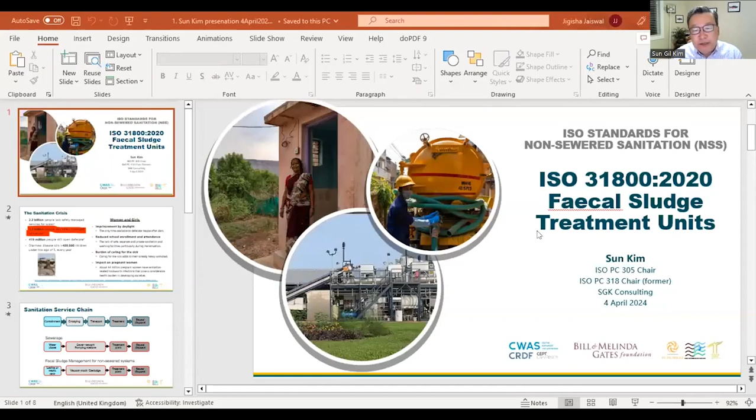As we discussed in the introduction, there is a tremendously bad sanitation crisis in the world, and it affects every country in the world, particularly developing countries. But even in the US, the country I live in, there are many areas where sanitation is problematic.

Per the joint monitoring program by the World Health Organization and UNICEF, currently 3.5 billion people lack access to safely managed sanitation. The tremendous toll it has on all humans, and particularly on young children, with preventable diarrheal diseases from fecal to oral contamination, is heartbreaking, and really it is a human rights issue.

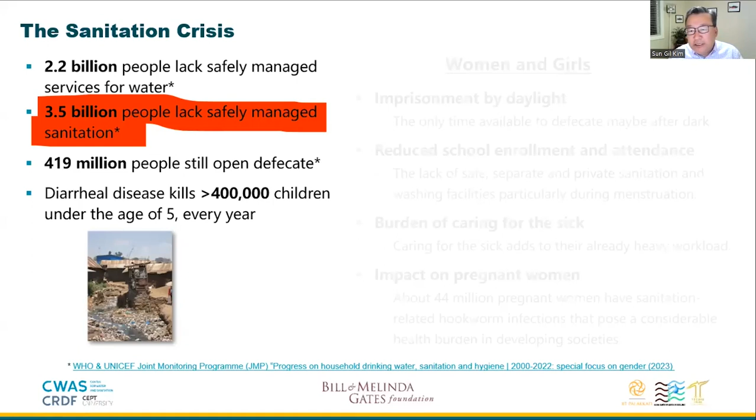The impact to women and girls particularly is extremely negative, especially considering that the impact of caring for the sick and also poverty typically has a much more negative impact on women and girls.

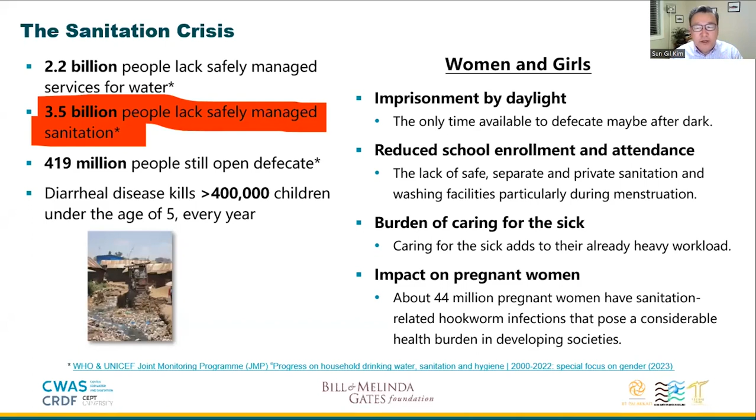The sanitation service chain, whether sewered or non-sewered, always includes capture, then conveyance through sewer pipes or trucks, and ultimately treatment and reuse or disposal. But oftentimes this does not work in non-sewer sanitation, where contaminated fecal material with all its pathogens just remains in the community.

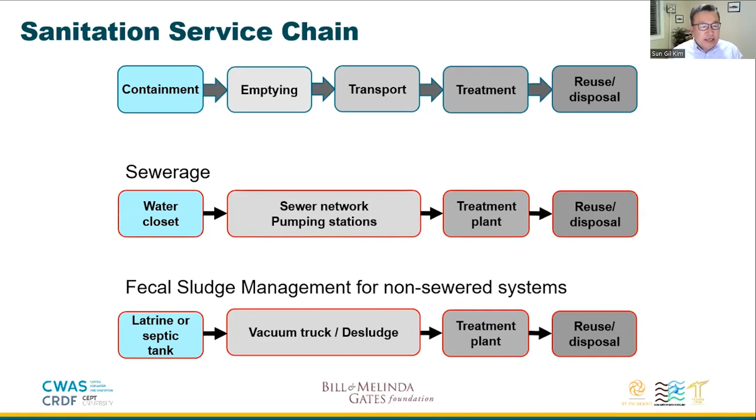This references the topic of our non-sewer sanitation webinar number 2, where we talked about ISO 30500, the reinvented toilet, killing pathogens, and containment and treatment all at the household or community scale, on site. That was on webinar number 2, available via recording.

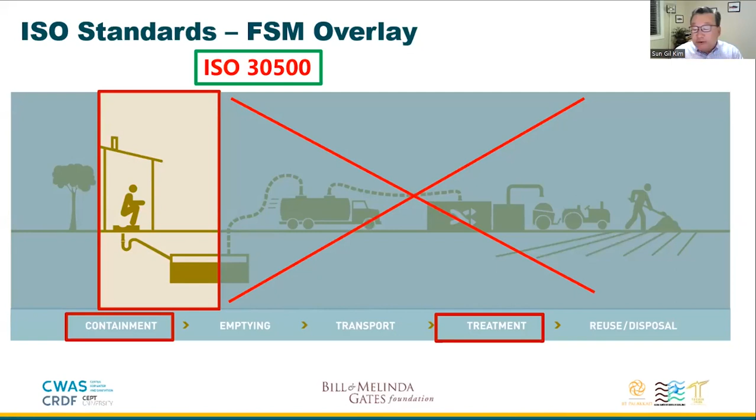The next slide references webinar number 3, ISO 24521, a management guideline that discussed the whole service chain. The topic of today's webinar, ISO 31800, is that treatment system - once the fecal material is collected and transported in mass, then what do you do with it? ISO 31800 defines the technical requirements.

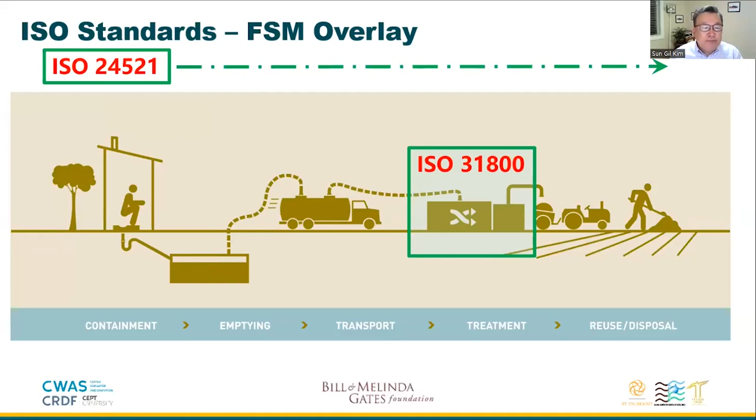I'll spend a little more time on this particular slide. These are the key aspects of ISO 31800: it's about a fecal sludge treatment unit, which is a component or part of the larger fecal sludge treatment plant. It defines the design, performance, and test requirements of such devices that would be manufactured and then assembled on site at a fecal sludge treatment plant.

Just like ISO 30500, which is for the household scale toilet and treatment system, this plant system is intended to be technology neutral. We have the privilege of having engineer Mansour Fall, who will describe in more detail two such systems - dry combustion and pyrolysis systems - as well as Professor Marc Deshusses, who will talk about a supercritical water oxidation system. These are really exciting.

While this will not be presented, there is also another type, a mechanical vapor recompression system, and you can read more about it at sedron.com/varcor. I'm really excited to discuss these technologies, to hear more about these technologies that are intended to be compliant with most, if not all, the requirements of ISO 31800.

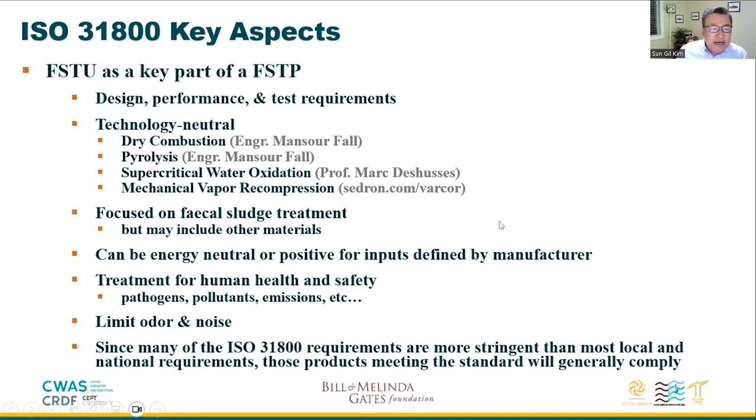So the final slide. Key aspects again: implementation of these quality standards will support market readiness, which is to support the regulatory environment. It's very important that you meet local and national regulations, and also to have readily available competitive products so that the sanitation crisis can be resolved in a manner helpful to the largest population possible.

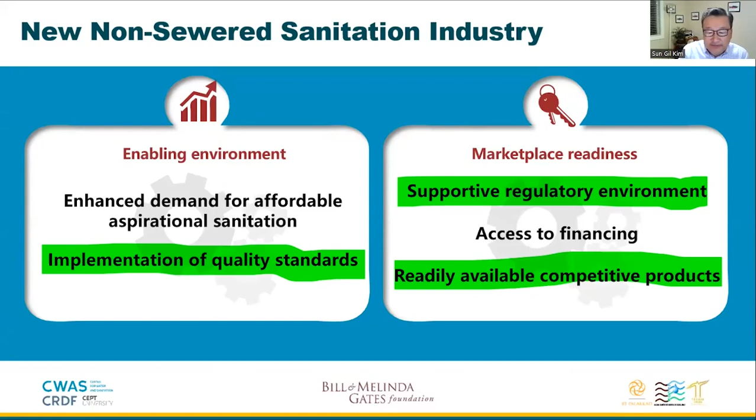So with that, I'll revert back to Dr. Devasena. Thank you very much. Yeah, thank you, Kim, for emphasizing the significance of implementing quality standards, as well as underscoring the necessity for this kind of regulatory environment and highlighting the key aspects of ISO 31800. Thank you very much. If there are any questions, we will take them at the end of the session.

Now let us move on to the next speaker. We have Chris Chan, Project Manager, Corporate Sustainability Office, TUV-SUD. He will be presenting on the scope and technical requirements of ISO 31800, and also the ISO 31800 certification process.

Before allowing the speaker to give his presentation, I would like to introduce him. Chris Chan joined TUV-SUD as a project manager with 5 years of experience with ISO 30500, and also served as technical lead in the development of ISO 31800. During his tenure at TUV-SUD, Chris has validated these standards, tested with manufacturers, and worked with laboratories to build up their capabilities in different countries including China, India, South Africa, and Senegal. Currently, Chris is working on certification of the first ISO 30500 product in the world, and also leads the 5-year systematic review process for ISO 30500 as project lead.

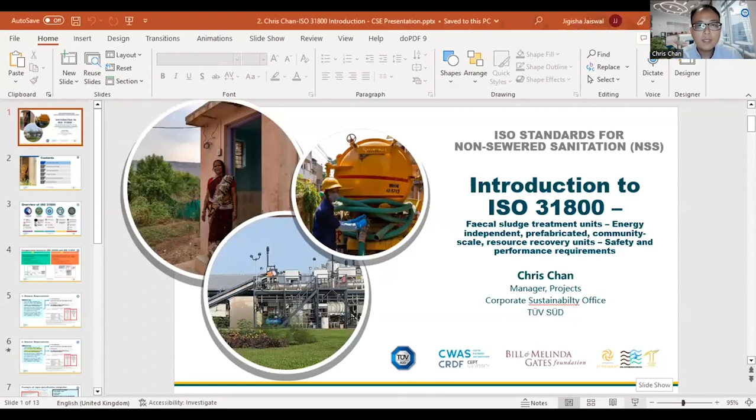Good morning, afternoon, and evening to some. So I'll be presenting the introduction to 31800. I hope most of you know something about it. If you don't, I'll go through what it's about, basically. Next slide, please.

So I'll go through a high-level overview of the entire standard. I'll only be picking out the major specifications for the standard, and then what makes it different, probably from other standards around, even for sanitation or non-sanitation products or plants. Next slide, please.

So for ISO 31800, similarly to 30500, the target audience are usually manufacturers. They need to know how to design their system according to certain standards or requirements that the market or general industry is looking for. Then you have government, regulators, and buyers who want to buy or invest in such equipment, so they might look into the standard to see if plants or FSTUs are compliant, or even partially compliant, to 31800.

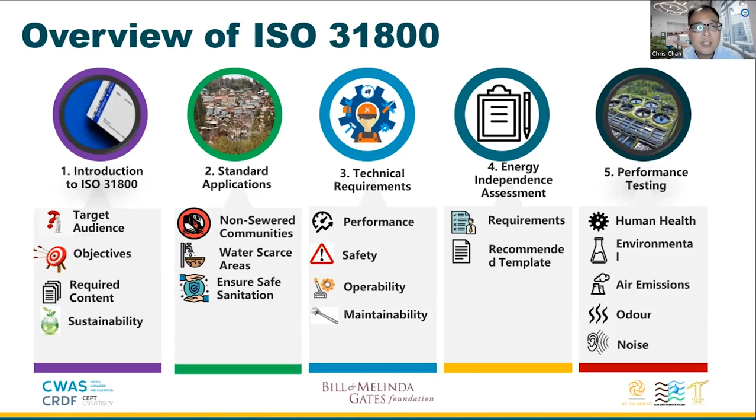It's something that is quite different from any other standards around. And then last but not least, performance testing, where what's coming out of the system, what are they being tested for?

Comparison between 30500 and 31800. Just wanted to see a show of hands. If everyone could use the chat to let us know: 1 if you are familiar with 30500, 2 if you are familiar with 31800, 1 and 2 if you are familiar with both, or 0 if you are not familiar with any of them. Could I get the participants to try to participate?

Cool, I see quite a lot of 1 and 2, and of course 0 as well. That's why you guys are here. A lot of 1 and 2s, not what I expected, because I thought you guys were here to understand a bit more about 31800. But of course, after the presentation, if there's more questions, in-depth or detailed questions that I'm not covering, feel free to reach out to us as well.

Okay, so with regards to the slide, what's the difference between the two standards? Since most of you know the standards, the major differences are the 5 points in the boxes, the green and the orange. 30500 has a user interface and a treatment unit, but 31800 is only for the treatment unit. The next major difference is 30500 is a household scale, small scale, while 31800 is a community large scale system.

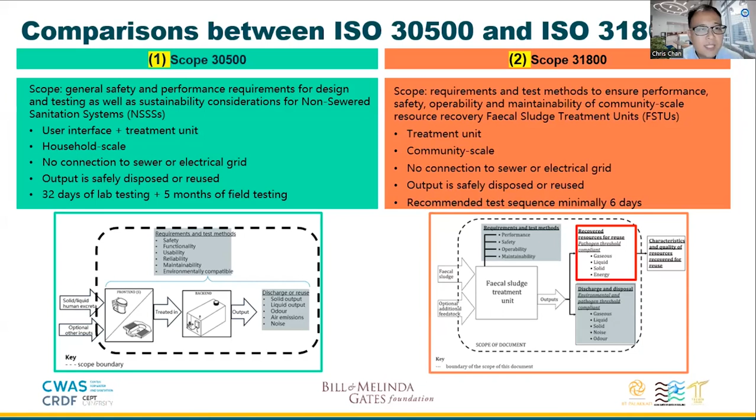Okay, just general requirements. Whenever we start testing, or the manufacturer comes to look at the standard, one of the most important parts is the FSTU needs to have an input range of input criteria, input parameters. The reason why is because we understand that anything can come into the fecal sludge treatment unit.

The vacuum trucks are collecting fecal sludge from households to maybe some pits or anywhere else, so they are not sure what is being dumped into these pits. That's why there is usually a range of what is coming into the FSTU. Before any testing is done, the manufacturer or operators have to tell us the range of parameters so that we can take into consideration if any of the days go out of range, we can disregard the test because it would be unfair to the operators or manufacturers.

So I highlighted this: primarily treated fecal sludge will be with the need for energy independence, but also secondary inputs. If you need biomass or wood chips or municipal waste to start the system, it can be put into the system as well without the need for energy independence. So energy independence is only for primarily treated fecal sludge when it's at steady state. I just wanted to highlight this.

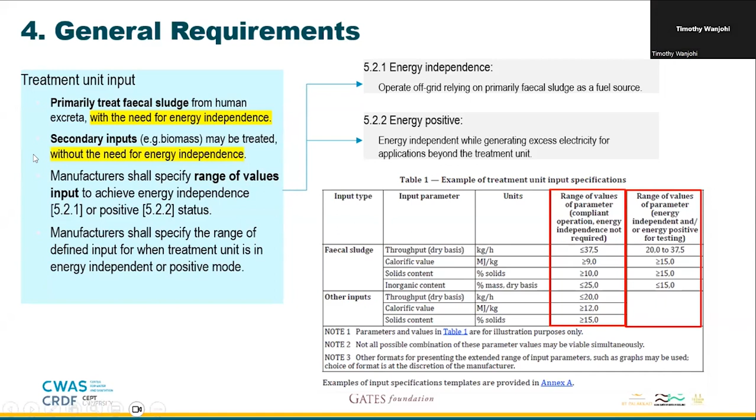So this is an example of what the manufacturers will provide to certification bodies like us: how much is the throughput, the moisture content, the ash content, calorific value, even if you have heavy metals in the fecal sludge - what are they? Because it will affect what is coming out of the system.

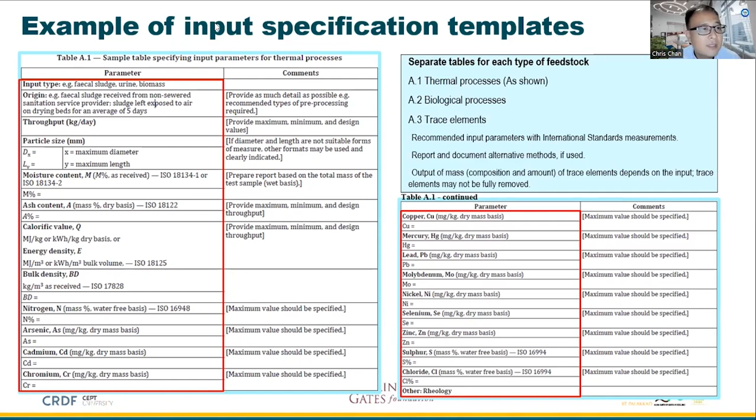So just a high-level overview of technical requirements. The standard requires manufacturers to declare the downtime, maximum technical availability, and there's documentation involved with HAZOP, mechanical and electrical requirements in the standard, as well as anthropometric and ergonomic design requirements. For example, maintenance should be easily accessible. Last but not least, maintenance adjustment requirements cover whether points are accessible, whether maintenance parts are provided, and whether this is in the manual. These are the very basic requirements for any plant, be it fecal sludge treatment units, boilers, etc. All standard in the industry.

Okay, next slide please.

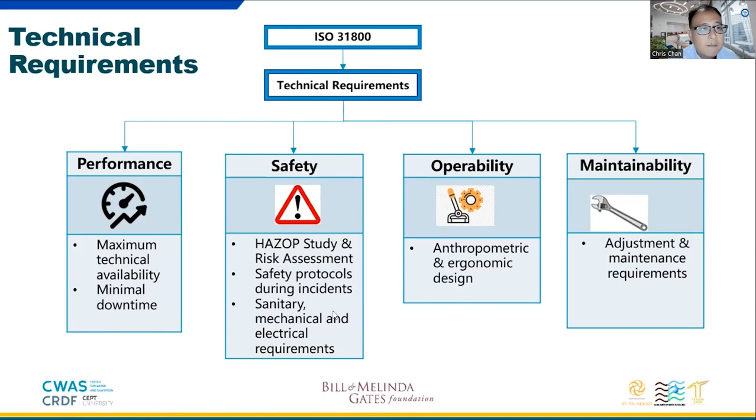Product literature documents also need to be submitted to the certification body, or are at least requirements in the standard. This includes basic system information, safety and maintenance, and complexity of the task - do you need a highly qualified person, or can lesser qualified people do certain stuff. Then there's the sustainability part, which covers consumables, the quantity required for operation, and minimal GHG emissions declaration. And of course, resource recovered products - what type of resources, or potential resources, can be recovered from the system. These are important information even for investors or buyers.

Okay, next slide please.

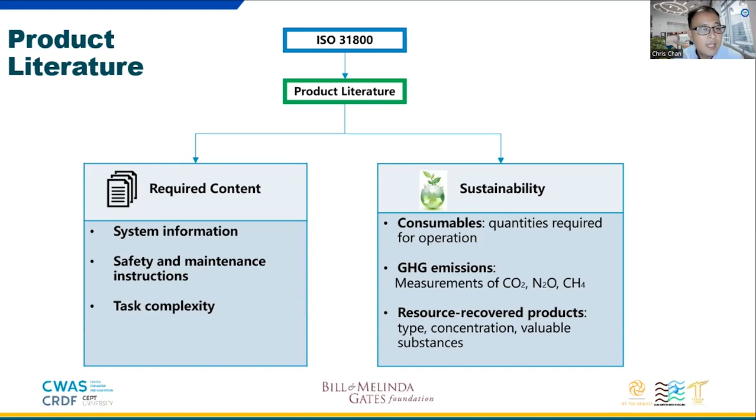Energy independence, as I mentioned, applies only when fecal sludge is the primary source. As you can see in the bottom picture, for energy independence the primary source should only be fecal sludge. But during startup, you can be connected to a solar system, grid system, or even a hydro dam, as shown in the photo. After reaching steady state, only fecal sludge goes through and it should run on its own, because fecal sludge sometimes has a high calorific value depending on the moisture content of what's coming in. Generally after it's dry, it's relatively easy to achieve energy independence. After going through the treatment system, energy is recovered - you may need an auxiliary generator to harvest the energy, whether it's methane or heat. As long as you can recover the energy and convert it back into the system, you're considered energy independent.

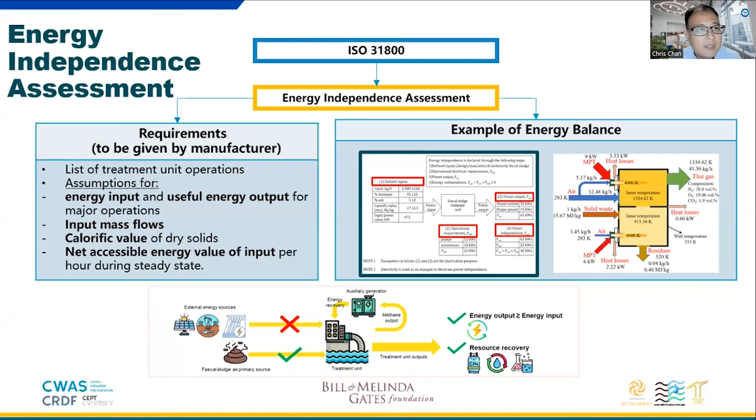Performance testing, as I mentioned, takes 6 days. What will be tested is an entire suite at the upper throughput limit and an entire suite at the lower throughput limit. One suite of testing, as shown on the right side, includes solids and effluent for 1 day, air emissions for 1 day, air emissions for dioxins and furans for 3 days, and noise measurement for 1 day - a total of 6 days. If you have 2 suites, it'll be a total of 12 days.

The defined input has a range, but even the defined input during testing has a buffer of plus or minus 5%. This additional buffer is built into the entire testing because sometimes the loading is done manually, and the input flow rate might differ here and there, so there's always a buffer in place.

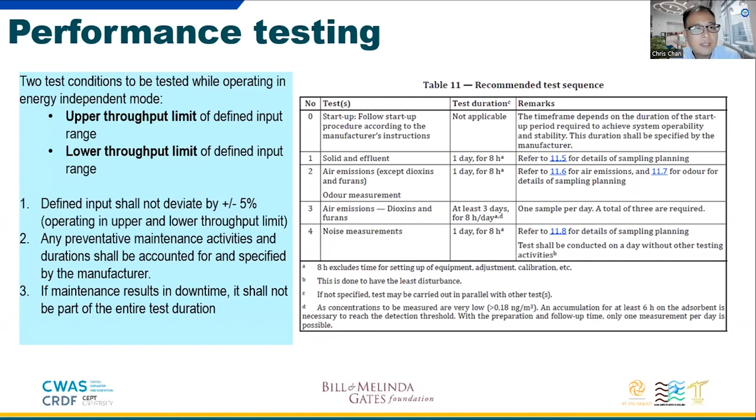Almost the last slide - performance testing, which a lot of people are very concerned about. What's being tested is the system output, be it solid or effluent. For human health, it's tested for bacteria, virus, protozoa, and helminths. For the environmental part, it's the usual COD, BOD, TSS, TN, TP, and a list of transition metals as well. And for air emissions, you have the relevant standards as referenced.

So air emissions, there'll be carbon monoxide and the usual air pollutants. And then you have dioxin, furans, arsenic, cadmium, mercury, and so on. All these are gotten from, during the standard development, they are gotten from usual plants such as boilers, incinerators, etc.

So delegates during the development of the standard discussed what could be the possible pollutants coming out from the fecal sludge treatment unit, and also what are the usual inputs coming into the fecal sludge treatment unit. With this, we came up with a list that's currently in the standard.

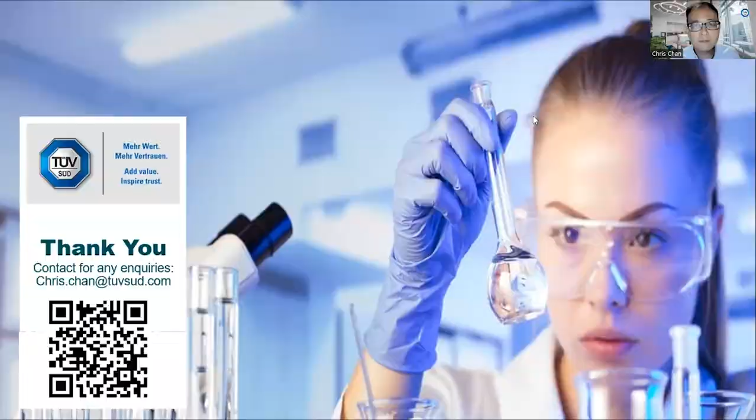Thank you, Chris, for such an interactive presentation. You have made us very active during your talk. You have given us an overview also, including the comparison of both standards. You have discussed the general requirements concerning inputs like fecal sludge, and for each feedstock what should be going in as inputs, including the energy independence assessment. You have also outlined the test sequence in performance testing along with the thresholds for this. Related questions will be taken at the end during the Q&A session.

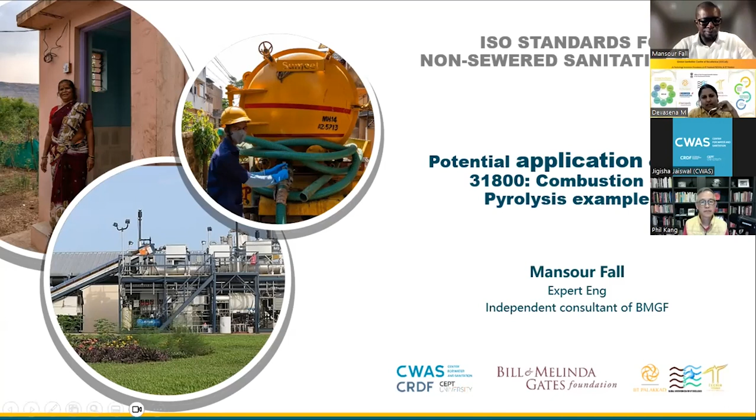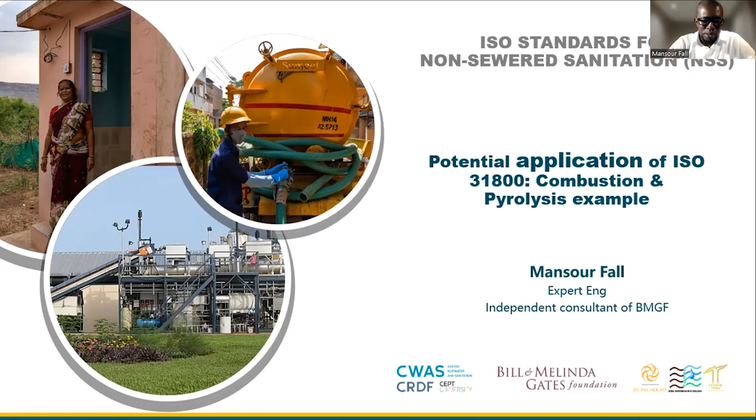Thank you for this presentation. Good evening or good morning, everybody. Yes, we're going to go through some examples of application of what we call the omniprocessor, and we're going to try to make it very simple and very digestible, so maybe it can help show how this ISO is used.

So let's just start by talking about the concept of the omniprocessor. Any technology, any industrial system is defined by its function. There's a primary function of any system, and there is some constraint function. Let's say the primary function of a mobile phone is to call, and there is some constraint function - it should be small, it should be this, and there is some additional feature.

So the omniprocessor is the same thing. The primary function is, it's an industrial unit that processes the sludge thermally to kill pathogens while reducing the volume and generating some bioproduct, as Sun Kim says. Killing pathogens and reducing volume are the primary functions of this system. And while doing that, it will just generate some bioproduct, and that will make it sustainable.

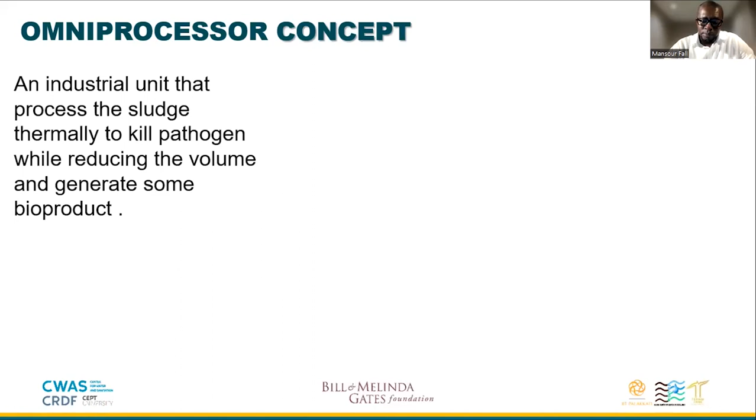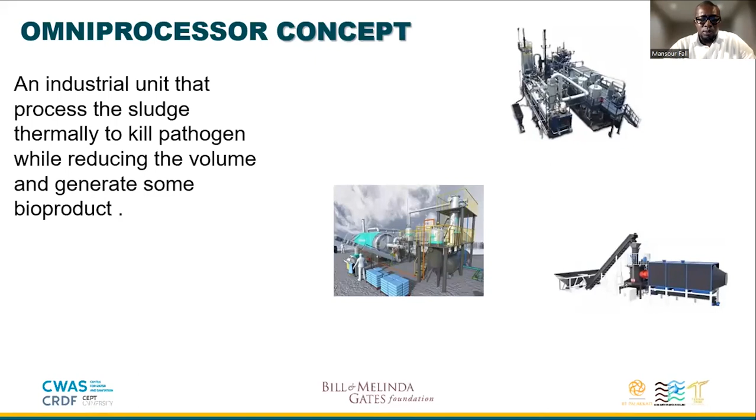Next slide. So we have some pictures of different configurations: the combustion system, the pyrolysis, and the gasification. We're going to define one of these concepts, and then we're going to give an example of what's existing in the world. Next slide.

So this is an example of a combustion system. Combustion reaction usually happens when you have oxygen, fuel, and ignition. When you have these three elements, you have combustion. There is a different theory in the definition, but it's a reaction that produces fire. To make it simple, it takes place at a relatively elevated temperature. It's a heat releasing redox chemical reaction that usually occurs between a fuel and an oxidizing agent, mostly oxygen.

Here it's oxygen. So this flow diagram is coming from Sedron. Sedron is one of the first manufacturers of the OP omniprocessor, and the first prototype was designed, built, and operated by Sedron. It's a very simple process.

Okay, sorry for that. So basically what the OP is doing is taking the sludge and using its characteristic of organic material as a fuel. If you took a power plant, they take fuel. If you took any biomass power plant, they take some biomass because it's organic alone, and they get energy out of it. That's what happens basically in the omniprocessor.

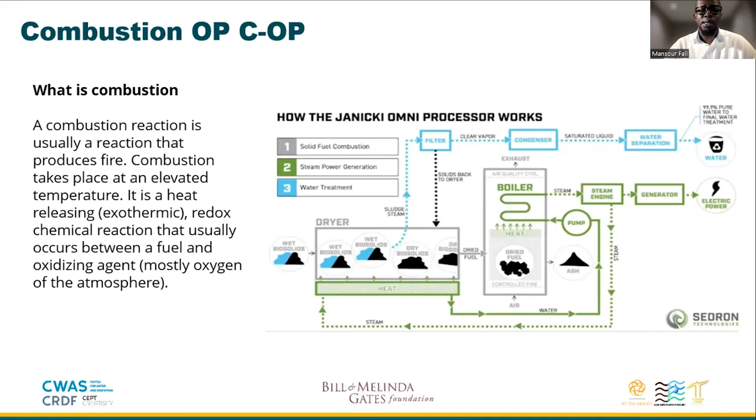Next slide. This is the initial system of combustion system. So now, go to the previous one.

The second generation. When they finished that example of omniprocessor, they gave the license to more companies like Ankur, which installed in India. They came out with a different approach. They said, okay, we need the basic system, but we need to do pre-treatment. What happens if there is no FSTP available? So they added some additional element to do the pre-treatment.

Pre-treatment means separating liquid and solid, treating the liquid, and handling the solids. So the primary function is there, but they add some additional function like wastewater treatment — not wastewater in terms of a sewage network, but all the sludge coming freshly into the system — and they put a volute press to do the separation of liquid and solid. So the septage goes to the dryer, and the dryer just dries it and sends it to the boiler like the initial one.

And the water goes to the MBBR, which goes into the normal treatment process, and out of that you have your process water. So this is the second generation of OP, and an example of this is available in the Vadodara plant in India.

That's how it runs. And now the system is evolving: Sedron was the first who did it in 2014, 2016, 17. Ankur joined the team and developed the second generation. Now they're working on the third generation of omniprocessor, which is more integrated.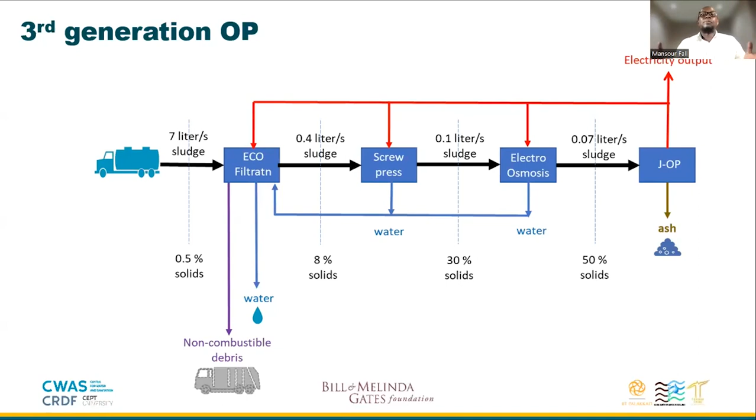In this configuration, imagine that you can dump right into the system: you have your component that does the filtration, you have the screw press doing the solid-liquid separation, and you treat your water, and you have your J-OP that does the sludge treatment. So this is composed of a water treatment system and a sludge treatment system. At the end of the day you have your output. But what's interesting, the value add, is that you treat the sludge and the water but make it compact, and you don't require a lot of space for that.

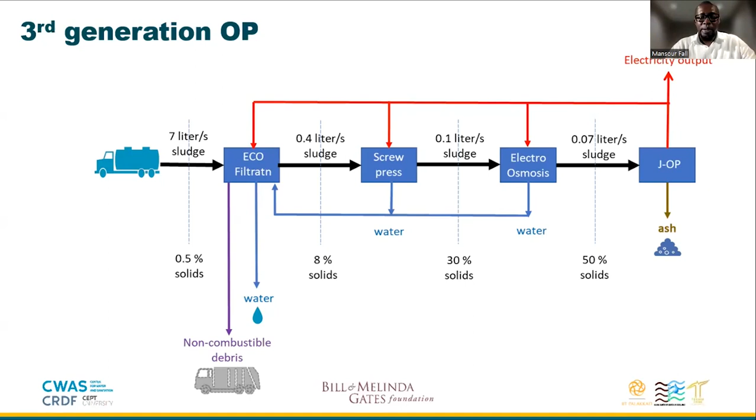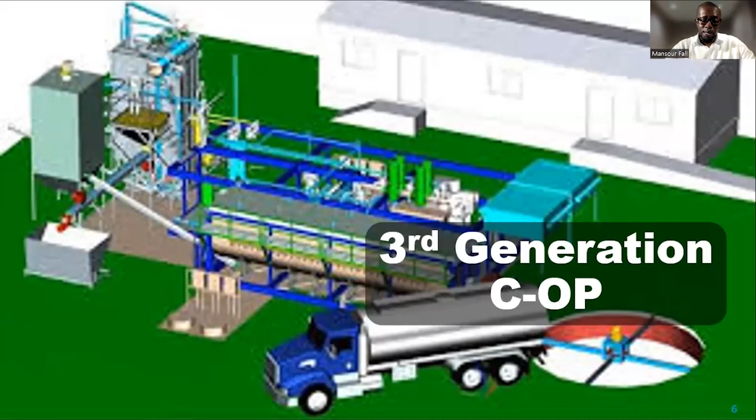This is the generation as well, showing how it's configured. You see the emptying truck dumping right into the machine. If you require like 2 hectares for a normal FSTP, for this one you just require something like 400 square meters and everything can work. This has some advantage because it can fit anywhere and you can handle the stress of urbanization. Next slide.

Now, as we talk about combustion, there is another system called pyrolysis OP. Pyrolysis is the heating of organic materials such as biomass in the absence of oxygen. The sludge is an organic material, and there are three ways to valorize it. One way is to burn it with oxygen - that's called combustion. We've seen different examples of combustion systems.

The other way is heating up without combustion - that's what we call pyrolysis. Or you can have controlled oxygen and heat it up - that's what we call a gasifier. So it depends on the process you are using. Combustion is heavier; pyrolysis is lighter than combustion in terms of components. You can heat it up without oxygen.

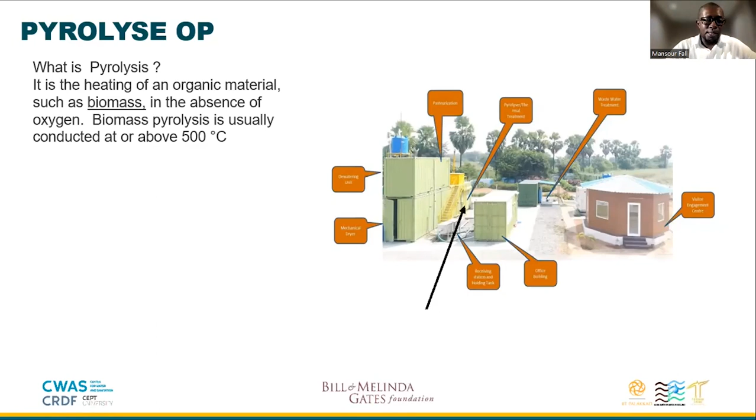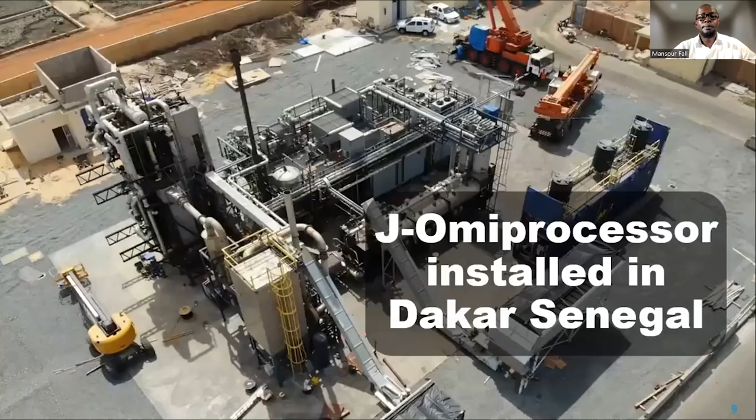This is the example of a combustion omniprocessor installed in Dakar, Senegal. The configuration here: there's an initial design, the first primary design, and this is the second generation. This second generation, in addition to the sludge, will also take some municipal waste like paper and cardboard. That's why on the right side you see 2 boxes - these are for the feeding system, one takes the dry sludge and one takes the paper or cardboard.

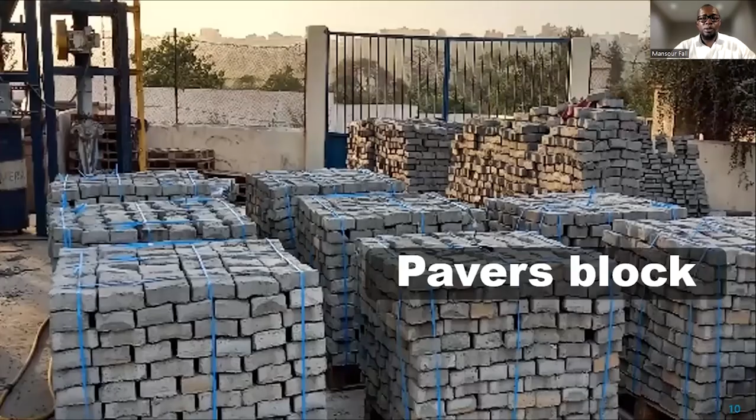As we talk about examples, the first and second generation were able to generate ash - all of them generate ash. A combustion system generates ash, and one use of the ash is paver blocks.

These were produced - oh, can you go back please? Yeah, these paver blocks were made with the first generation of OP, because whatever happens in the OP, we're sure that when you burn it, you have ash out of it. Generally 30 or 40% of the sludge becomes ash. Ash can be used as a substitute for cement, so rather than using 100% cement, you can use 60% cement and 40% ash, and have paver blocks with the same characteristics as if it was 100% cement. That was tested in 2015, and since then the demand has been very high, because as soon as people know it's coming from sludge, they call them organic pavers and want to have these pavers. So this is an application of bioproducts coming out of the omniprocessor. Next slide.

And yes, talking about fertilizer as well. So when we have one part of the ash used as a substitute of cement, one part can be used as a fertilizer. It's not directly used, but you mix it with the compost. They realize that with the compost, mixing the ash, it becomes a very organic mineral fertilizer and can replace the synthetic fertilizer used in the field. So all the people doing organic farming are very interested in this.

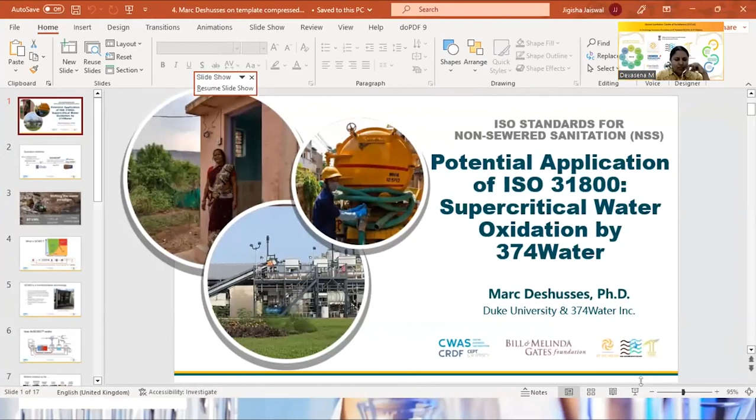Professor Marc will be speaking on the potential application of ISO 31800, based on supercritical water oxidation as the predominant FSTU. Before requesting Professor Marc to present, I would like to introduce him - he is a professor in the Department of Civil and Environmental Engineering at Duke University. He is also the co-founder and head of technology of 374 Water, a NASDAQ-listed clean tech company dedicated to the commercialization of supercritical water oxidation. Professor Marc has three decades of experience in developing and optimizing novel waste-to-energy processes, including green processes for pollution control and resource recovery. He holds a degree in chemical engineering, and he is also a fellow of the American Association for the Advancement of Science. So I welcome Professor Marc to present us on the potential application of supercritical water oxidation process. Over to you, Professor Marc.

Thank you very much, and thank you for the opportunity to speak. As was said, my name is Marc Deshusses. I'm a professor at Duke University, but I'm also the co-founder of 374 Water. So I'll be speaking from both these angles - as a researcher and developer of technology, as well as someone involved in this company, 374 Water, on the tech side. Next slide, please.

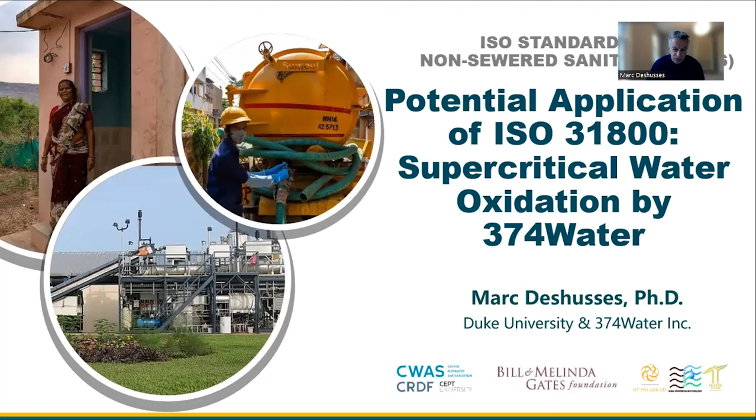Going back to around 2011-2013, the Bill and Melinda Gates Foundation started an effort to reinvent the toilet, revolutionizing sanitation. Around 2013, I received initial funding at Duke University to develop this. I did not invent supercritical water oxidation, but we made it work at scale. This was the initial funding to build a pilot system that could treat fecal sludge in a box. Fast forward to 2018, I co-founded 374Water to take it commercially. We're now listed on NASDAQ, with about 30 employees worldwide, commercializing this treatment we call SCWO in a box.

So what is SCWO? That's the point I'll be talking about during this short presentation, trying to explain what it is, what it can do, and how it fits with the 31800 standards.

So where we started was looking at this picture, and you can look at it and say, well, this is fecal sludge being dumped, but you can also say this is energy. How much energy is in this barrel? It's roughly 87 kilowatt hours. At the same time it's a lot, and it's fairly diluted in water, but it's the same energy as 10 liters of gasoline or the energy in a Tesla battery pack. The question then was, can we develop a technology that can harness this energy, sanitize the waste, recover resources, and do it with the energy that's embedded, this 87 kilowatt hour?

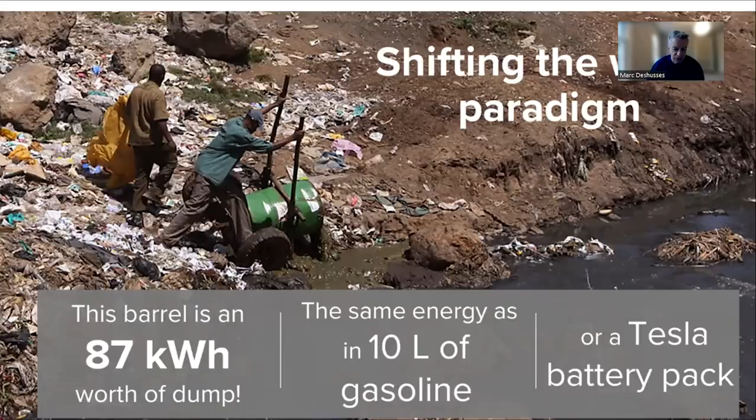So on this slide, what you see is a phase diagram of water. We're all used to thinking of water as a solid, liquid, or gas. It turns out there's a fourth state of water. If you heat and compress water beyond the supercritical point, above 374 degrees C and roughly 220 times atmospheric pressure, water becomes supercritical. It's neither a gas nor a liquid. It has amazing properties—it's semi-dense, with very rapid heat and mass transfer. That allows amazing oxidation reactions, very fast reactions that happen in the presence of an oxidant, and we use air to provide the oxygen.

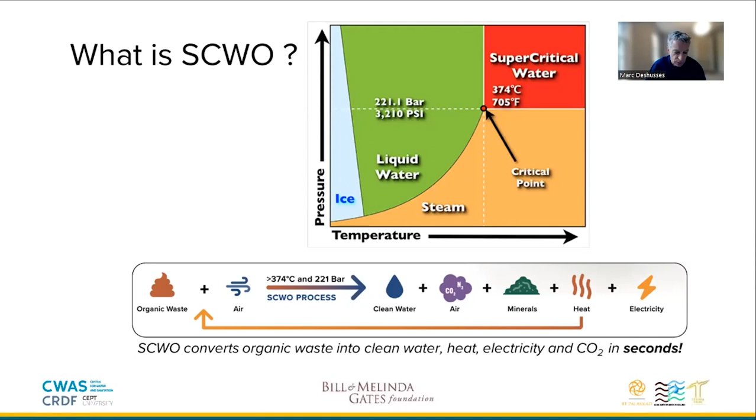What you see is the reaction illustrated at the bottom of this slide: any organic slurry—you don't have to dewater or dry the waste—compressed and heated above the critical point, with air added, will very rapidly react to mineralize all the organic elements and yield the most stable form, water and CO2. The minerals fall out of solution. This is an exothermic reaction, so you recover the heat of reaction, which is used to preheat the waste and bring it to supercritical condition. Surplus heat can be converted to electricity. All of this is extremely fast—it happens within a few seconds.

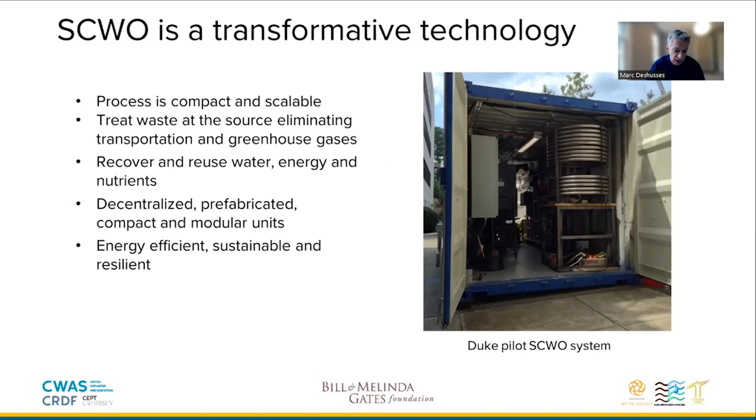So it is truly a transformative technology. It is novel, not just incremental—not just assembling a few known technologies together. It is different. On the right-hand side is this one ton a day pilot system that was built and run for many years at Duke University with funding from the Gates Foundation. Again, one wet ton a day, in a 20-foot container. I think it's transformative because the units can be made very compact and small. We can therefore treat the waste at the source, embedded in a community, and recover resources—clean water, minerals. I'll show you pictures in just a few seconds. You can do it in a very efficient way.

So what's in the box that 374Water is commercializing? This is a high-level diagram of the process. Look to the left: you enter with the wet waste, and it is preheated. There it will meet compressed air that is also preheated through a standard scuba diving compressor. Then it passes through a long tubular reactor where the oxidation reaction occurs and the temperature increases.

Downstream, it's all about phase separation and energy recovery. The streams get separated—the vapor and compressed gas get expanded, resulting in a harmless gas that is vented, and condensed water that is distilled quality water. About 40% of the water comes out as distilled quality water. The rest pushes the minerals through a cooler, yielding a dual phase stream with minerals and water. So to recap: what enters is air and wet waste, and what comes out is a harmless gas, distilled quality water, and minerals. Depending on the scale, this can be made energy neutral, energy positive, or consume a little energy. That's the gist of the process.

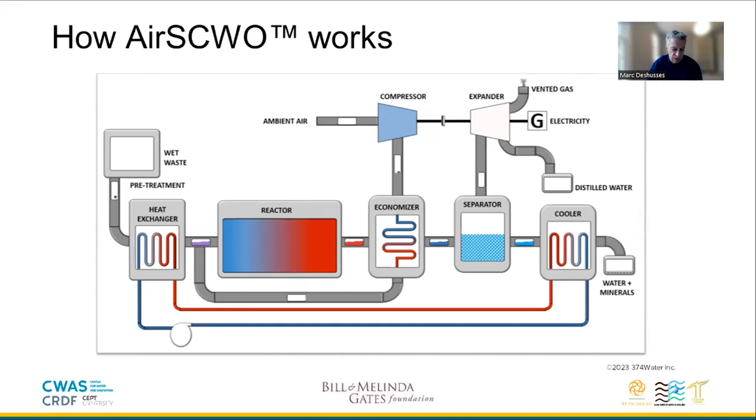So these are some of the wastes that we've treated at Duke in our pilot. You can see on the top line a heavy focus on fecal sludges and sewage residues, animal waste, but we've also done food waste, chemical waste, pharma, food and beverages, and mixtures of these.

The commonality between all these wastes is that they need to be concentrated. Oftentimes I say milkshake, not tea. What I mean is we need the calorific content in order to have the highly exothermic reaction to power the heating of the waste to supercritical conditions. So when we treat landfill leachate, for instance, we need to add a co-waste or co-fuel, which can be an alcohol, diesel, fat, oil and grease, or any other high energy content waste.

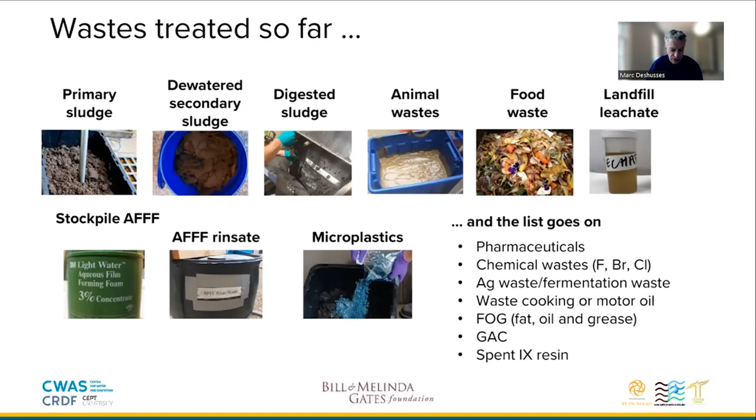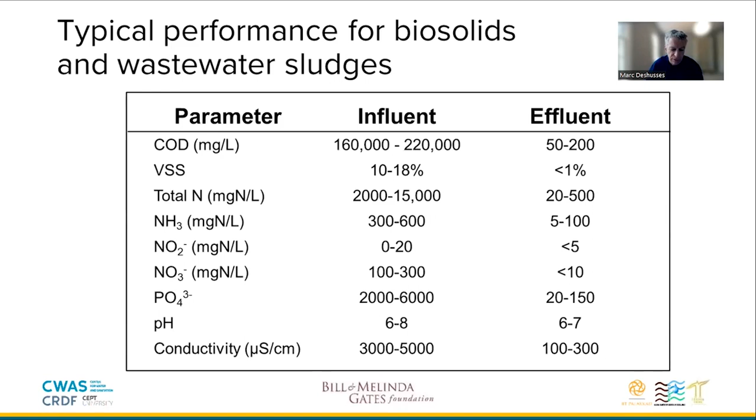Here's some examples of average indicated values of the influent and effluent when we treat sewage and wastewater residues. You see a very high inlet COD and very low values in the effluent. Nitrogen is also reduced — we're losing nitrogen as nitrogen gas in the process. However, we concentrate the phosphorus in the solids collected at the effluent. There's a great reduction in conductivity because of the minerals that fall out of solution.

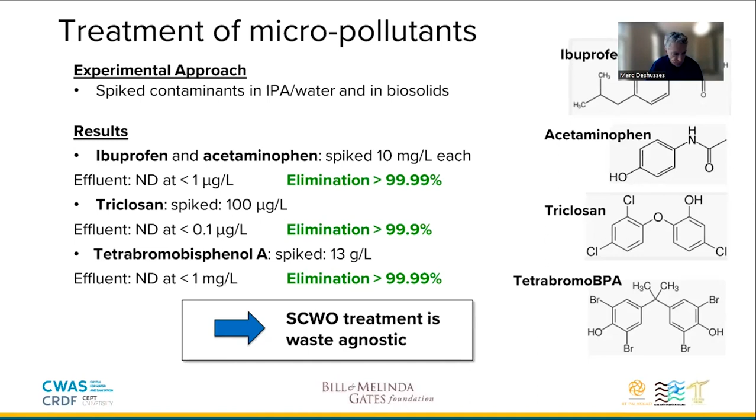We always get the question of energy balance. This slide shows the input and the energy requirement or output projected for the commercial units that 374 Water has in the works. We're currently commercializing what we call the AirSCWO 6 for 6 wet tons a day — one 40-foot standard shipping container. I'll show you a picture in a minute. That unit will take about 6 wet tons a day at 15% dry solid — roughly the sweet spot for the right calorific content. And it will use roughly 10 kilowatts, or 240 kilowatt hours per day.

This has certain assumptions on energy recovery. Again, these are projections — we will produce a large amount of heat. We have a lot of heat recovery in the system, but it's low-grade heat that can be used to heat buildings or dry food, fish, tea, or any use you can think of. At larger scale, the AirSCWO 30, which is not yet fully designed, we project will be 3 containers and will actually produce electricity with similar input, because of economies of scale.

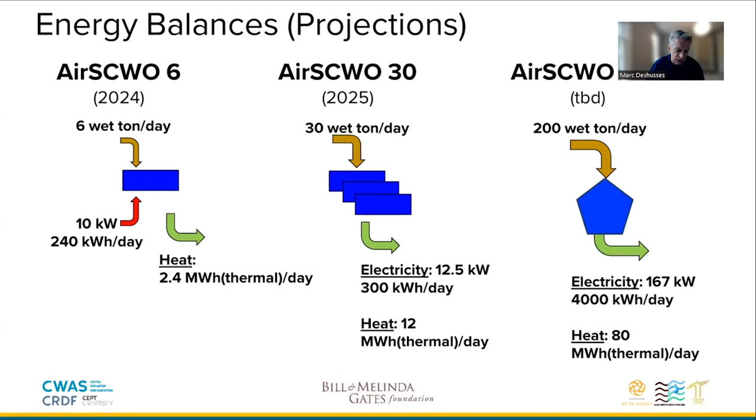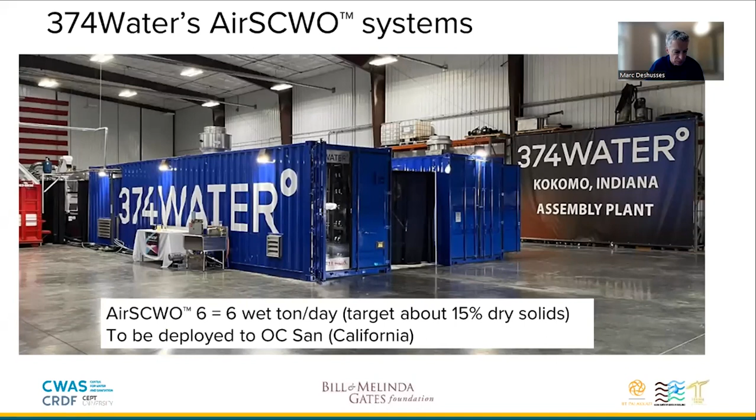So this is a picture of what these units look like. This is the first system that will be moved to Orange County Sanitation District in Southern California — again, a 40-foot container.

Since this webinar is focused on the ISO standards, I've put this table together to see how we project doing with respect to the standard. I picked a few criteria as Chris shown. There are many, and I just picked a few.

On the first line, the question of energy independence, which in a nutshell says the unit shall be able to run just on fecal sludge input and be able to run off grid just on the energy embedded in that fecal sludge. As I showed in the previous slide, this will not be met with the AirSCWO 6. This is just not possible with the supercritical water oxidation process as 374 has designed it. However, we expect it to be met at the AirSCWO 30 scale, and this is with sludge at roughly 15% solids.

In terms of health parameters, helminth, pathogen indicator, bacteria, etc., it's very obvious that we will meet all criteria. The temperature in the process greatly exceeds any temperature that destroys living organisms, so they will have 9 log reductions or more, and so we'll meet these criteria.

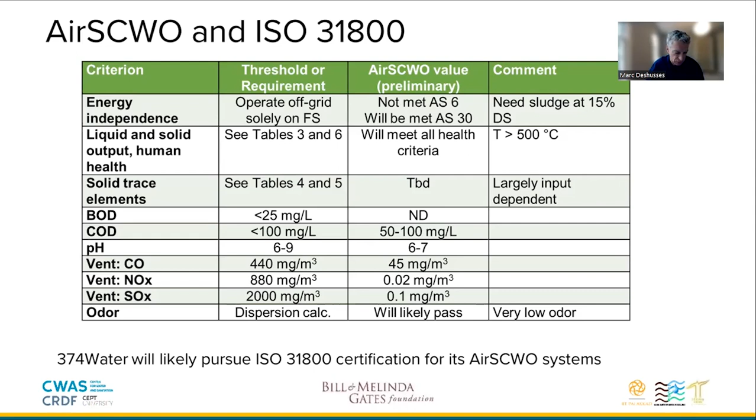Next slide, please. I have a couple more slides. I want to share with you some of the things that I'm excited about.

I mentioned that the AirSCWO system is really for concentrated waste. But we have some ideas about merging it with a membrane bioreactor for a combination that would be able to treat sewage, and that would enlarge the window of application. Imagine some sort of waste feed in the range of a few thousand cubic meters a day being treated in a membrane bioreactor, and all the solids, including the kitchen waste, organic waste of a small community, could then be separated and treated in the AirSCWO system for recovery of resources and returning the water to the other treated effluent from the MBR package for reuse. So this is one way that our system can be integrated in a decentralized treatment.

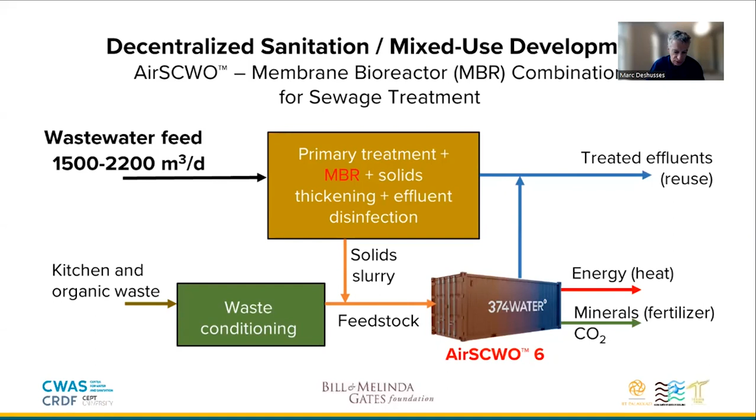Next slide, I want to share a project that we are an active participant of in deploying the AirSCWO system in a resource-constrained setting. We've been working with partners, in particular an NGO called Global Partners for Development, GPFD, and you can see the web address there, on deploying a demonstration, but it's more than just a technology demonstration. It's about providing an ecosystem for data collection as well as for waste management and resource recovery.

In particular, we're targeting the region of Homa Bay, which is near Lake Victoria. We're working with the local branch on the ground, with the local government, with the University of Nairobi, to put this project on the ground and show a pathway to scale for waste management and treatment that includes supercritical water oxidation. So excited about that. Visit that website for more information.

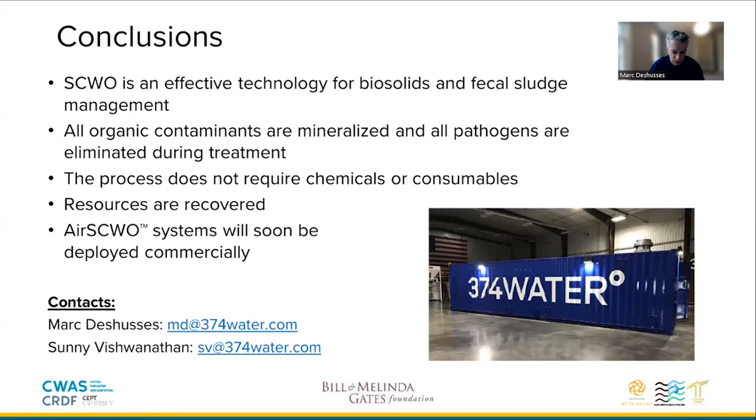And next slide will be my last slide, just a conclusion. I hope I was able to convey the excitement that I have about SCWO, because I think it's a really transformative technology for biosolids and FSM treatment. We address all the organic contamination as well as pathogen. The process is very sustainable. It doesn't require any chemicals or consumables, and it allows resource recovery. So follow us, stay tuned, stay in touch for more news and seeing these systems being developed. Thank you very much for your attention.

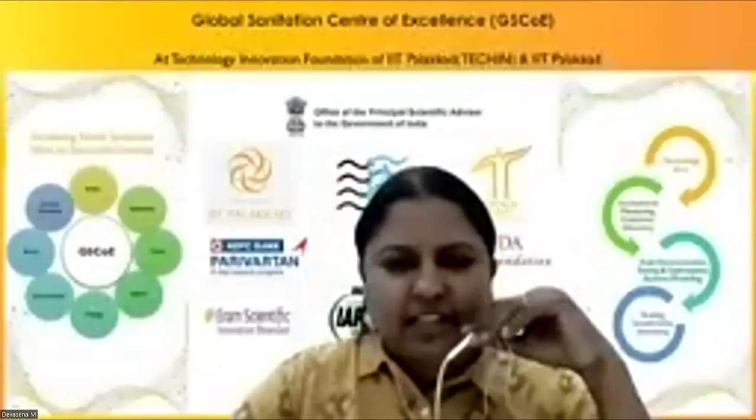Thank you, Professor Marc, for presenting us a very promising transformative technology, where modular units can be prefabricated and the technology can be implemented. It was very interesting to see the different kinds of waste, including the recalcitrant compounds, pharmaceuticals, microplastics, all can be treated. Thank you very much for the wonderful presentation. Next, we will move on - I will invite Mr. Sun Kim once again to the forum to showcase the status of adoption of ISO 31800.

Just as a quick recap, this really is exciting. I think there's some comments about cost, and these are technologies intended to address specific concerns about pathogens and treatment. Of course, if there are other systems better able to do this at lower cost, that's always of interest. But it is really exciting that these systems are coming online, and as they become commercialized, they will become cheaper. Imagine the handphone, when they were thousands of dollars and you could only talk to people on them. Now they're supercomputers in your pocket.

But anyway, for the interest of time, I think Dr. Priyan Arumugam also asked a very similar question related to national adoption of standards. So with that, I'm going to share a screen - sorry, I think I'm sharing the wrong screen here, let me share the correct one.

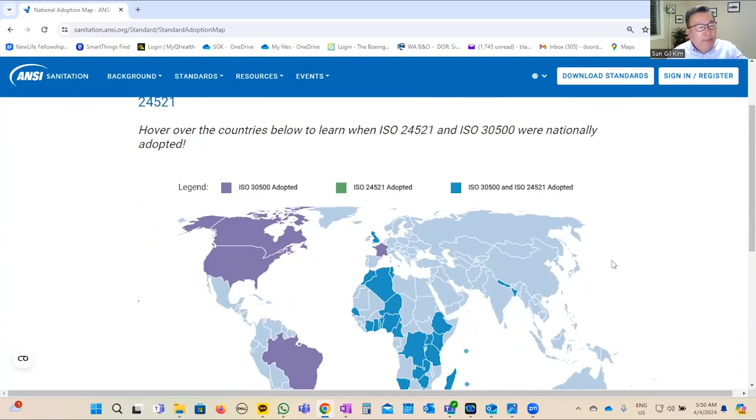But if you go under standards and the drop down, go to the national adoption map, you will see that it tracks in numerical form the topic of webinar number 2, the topic of webinar number 3. Specifically 31800 is not explicitly aggregated here, but if you hover over countries, you will see, for example, Senegal has adopted at the very bottom there ISO 31800, along with the standards for the reinvented toilet or household scale toilets, as well as the guidelines. Other countries, such as I think the DRC, have adopted ISO 31800 in the middle there. I believe Bangladesh has also adopted it.

So there are a number of countries, and further to Dr. Priyan's question, South Africa is in the process, I believe, of looking at adopting 31800. So this is a great resource to look at in terms of national adoption. But again, the standard and its implementation as a national standard, and then also the technologies - all of these things have to come together to really resolve these sanitation issues. So with that, I'll stop, and I believe there might be some questions. Thank you.

Thank you, Kim, thank you very much. There are a few questions. For the interest of time, I thought I could read out certain questions, though some have already been answered by the speakers in the chat box. The first question was: which countries have adopted the standard? I think the map has given us the answer with the support of Kim - he has already explained which countries have adopted it.